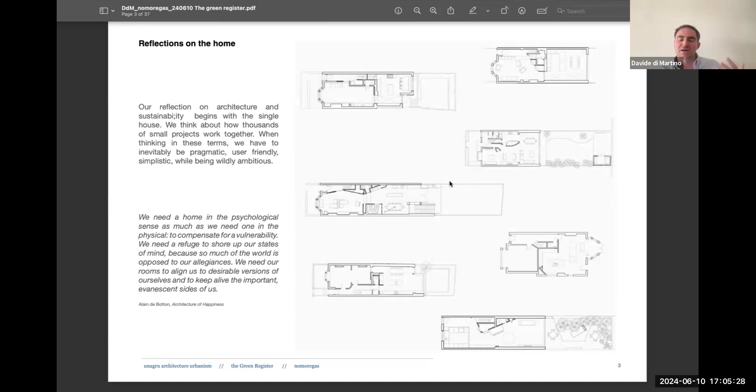And therefore, while we work on very single particular cases, our eyes are always open and attentive to policy and to changes in technology. So these are some of our houses, and these are some of our urbanism proposals. And so part of our passion for architecture is sustainability.

We are concerned about climate change, of course. And so we spend some of our time on research and doing things that we like and we think are good. And Nomoregas is one of these things that we did 18 months ago. So why and how?

Well, at the beginning, it was the war in Ukraine. I personally felt a bit helpless and useless facing this kind of aggression, and it was really troubling me. And so being a designer and also a researcher with some academic experience in my past, I decided to try and research and provide information to help in some way reduce our reliance on Russian gas.

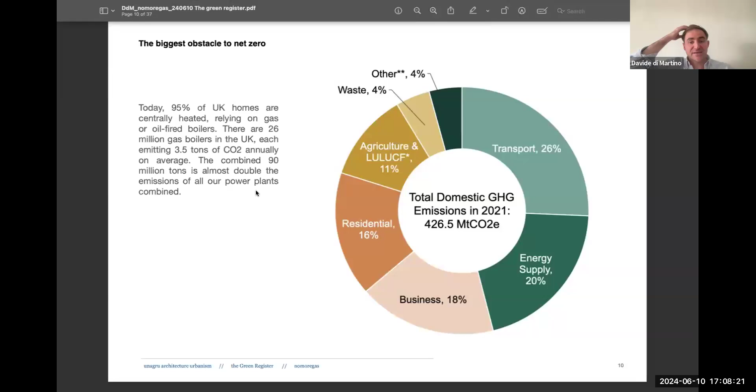And this is because what the data says is that gas boilers are probably going to be, in the medium to near future, the biggest obstacle to achieving net zero, especially in the residential and business sectors, because it's probably the hardest problem to solve. In fact, today 95% of UK homes are centrally heated. There are 26 million gas boilers, which combined emit more greenhouse gases than all power plants together.

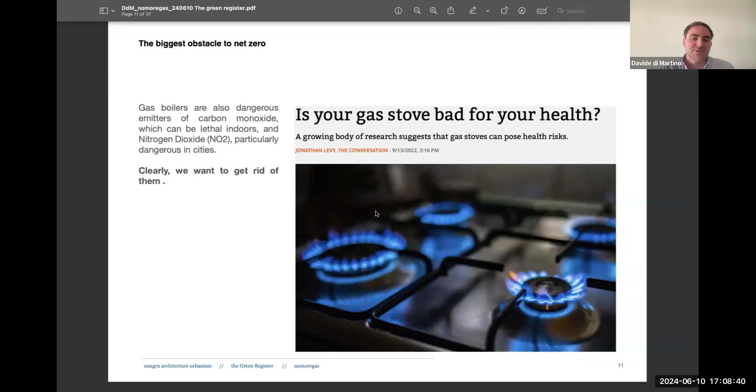Gas is also a health hazard, both indoors and in the cities, because the combined effect of so many boilers affects air quality. And there are so many boilers that a lot have to be replaced. About 1.7 million boilers are replaced every year. That's about 1 every 8 minutes. And unfortunately, of those, only 35,000 are replaced with heat pumps.

The pace of replacement is so slow; it would take hundreds of years to get there. So clearly, something is wrong with policies surrounding boilers. But if we don't tackle this issue, then the greenhouse emissions from the residential sector and from the business sector will hardly reduce quickly enough.

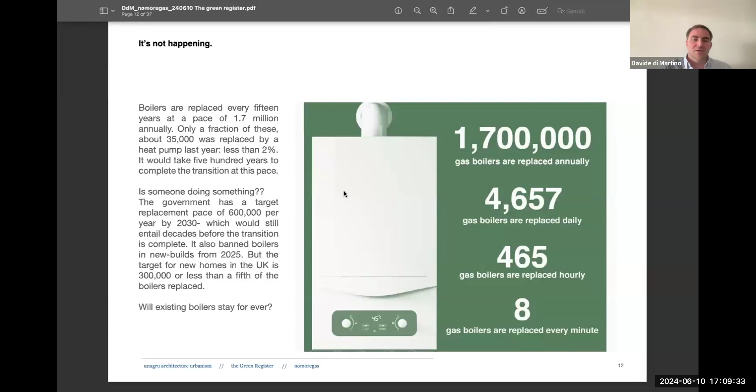So where does the research come in? The obstacle to replacing gas boilers is twofold. On one hand, there is, of course, economics and policies. On the other hand, there is a lack of technology or knowledge of technology. The best alternative to a gas boiler is a heat pump, which is essentially renewable energy.

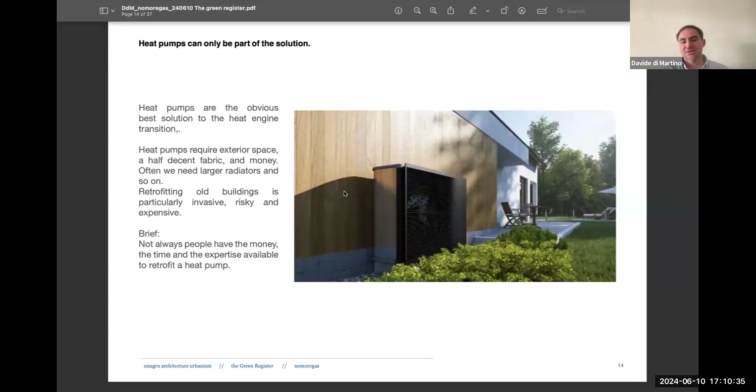But if we investigate all the case studies of the UK built environment, there are many cases where a heat pump is either too expensive, too invasive, too difficult. There's not enough open space, etc. So Nomoregas comes as a recognition that we need to find more alternatives to gas boilers that are not just heat pumps and are not just direct electrics.

Among the sources of our research is this Carbon Trust report on the policies that could help transition away from gas boilers and towards heat pumps. This was the focus of that report published by the Carbon Trust for the GLA.

And that report showed that in several cases, especially small leaky houses and flats, installing heat pumps was either not viable at all or too expensive from a carbon point of view, which means the extent of the retrofit required to install a heat pump entailed so much investment in carbon dioxide at the beginning that it would take too long to pay back. And this told us that connecting retrofit with the energy engines, which is boilers, sometimes is not the best idea.

Because, as we said before, there are 1.7 million boilers replaced every year. We cannot imagine that to replace each one with an electric alternative, we have to deeply retrofit the house.

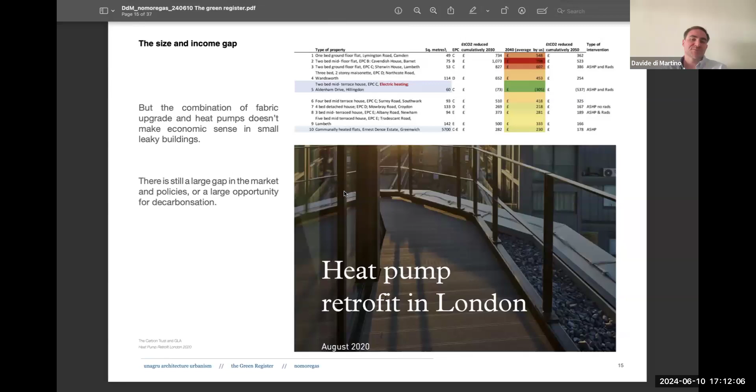So we're talking now about decoupling deep retrofit from replacing heat engines, to have more and more opportunities to replace the heat engines even before the retrofit. And one more reason to be careful about connecting heat engines and retrofit is that in old buildings, retrofits have to be very, very accurate and careful, because there are several risks of kind of ruining old buildings.

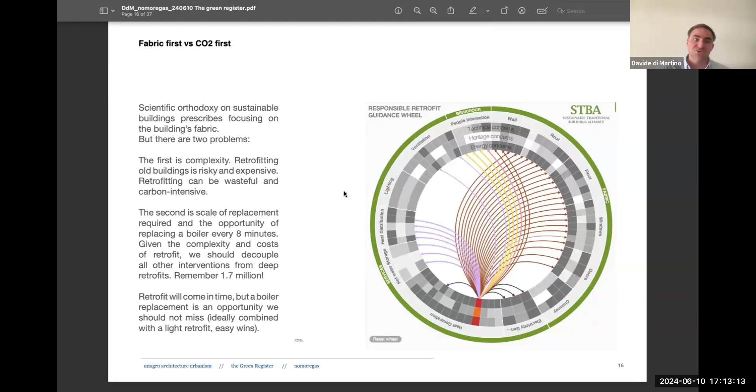And there's no need for me to explain this in this context because, of course, we all know, having attended Green Register seminars in the past. But suffice to say that there are several institutions and bodies that help us understand the complexity of retrofitting old buildings. And in many cases, at least in our work, we tend to suggest to our clients to be very, very careful and to select accurately the best interventions on old buildings. In fact, retrofits can go awfully wrong, even with the best intentions sometimes.

Now the main reason why gas boilers have been so popular, apart from technology, and have remained popular in the last few years, is that the orthodoxy said that the price of gas is lower than the price of electricity. And this has been historically true, but we've also seen with the war, for example, how the price of gas can escalate, and therefore there's a volatility there that creates a degree of risk of relying entirely on gas.

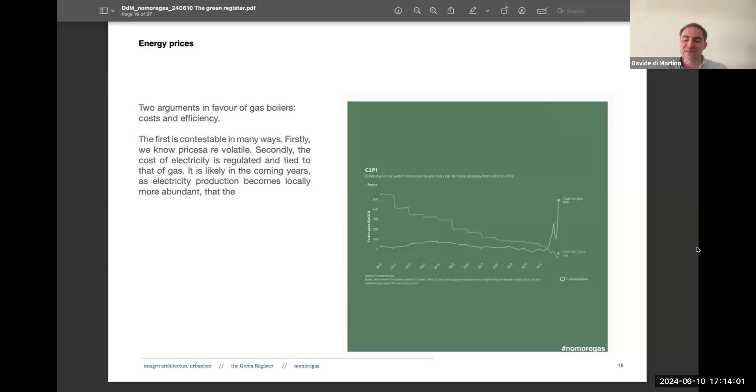Another part of the orthodoxy said that to switch from gas to direct electric heating would entail a higher output of carbon dioxide. So until, say, 10 years ago, to replace a gas boiler with direct electric heating, say electric radiators, would have caused more emissions of carbon dioxide, because the electricity required to heat a space was generated with gas-fired power plants, and the inefficiency of the electric heater made it so that the same amount of heating was causing more carbon dioxide. Now this has changed, and this is changing.

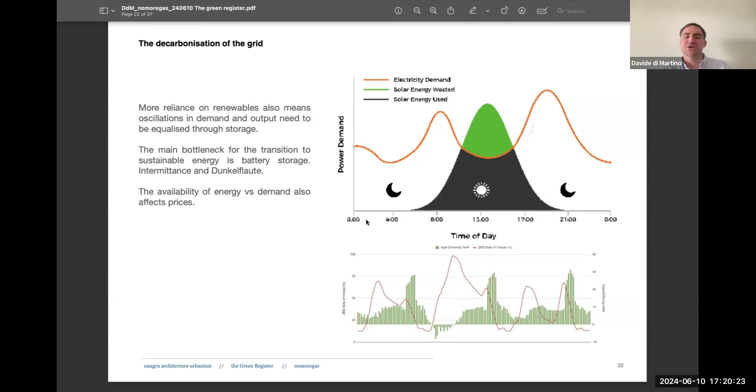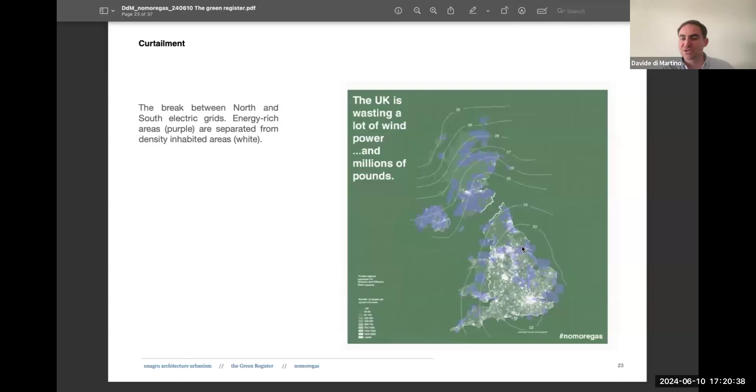Now, if the grid is decarbonizing, it also means that there is more intermittence. There are several other issues with the grid, and with these issues come questions about the cost of power. So of course, the power is more expensive when there's high use, especially with solar and wind. So among the technologies that we have sought for at No More Gas were the different forms of heat batteries. Furthermore, apologies, there are also issues with the way the grid in the UK is built, where most of the production from wind comes from the north, and most of the consumption is in the south, and there are not enough connections between north and south. In any case, this means that there's more and more need for ways of storing energy, whether it's electric energy or simply heat.

So among the technologies that we have promoted and incorporated in No More Gas are heat batteries. This is one of them, but there are now more and more coming onto the market. These are machines that are connected to the internet, so they figure out the costs of energy during the 24 hours. They charge up with heat when the energy is cheaper, and then, effectively a heat battery, like a big warm concrete stone block, it will heat water when needed.

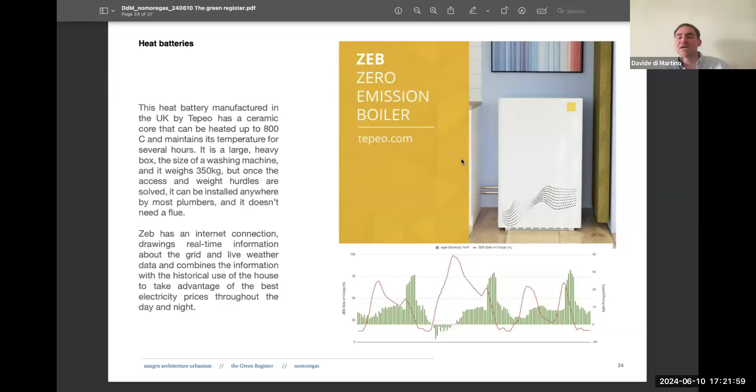And so these products, of course, are not gas boilers, therefore are electrically charged, but they could also help ease the peaks and troughs of energy production, because they of course charge when there's an excess of energy and discharge when there is an excess of demand.

Another version of this heat battery is this product called the Mixergy tank, which I think, again, at the Green Register, is quite well known. In this case, it's a pressurized hot water cylinder that again is connected to the internet and charges when there is the least demand, if possible, when the cost is lower, and also uses less energy because it heats the water only to the extent that is needed.

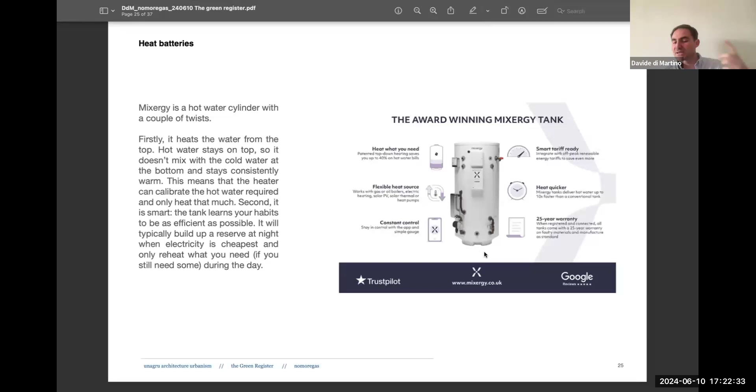Sorry, can you hear me? Yeah, we can hear you now. How long have I been muted for? Oh, only I think a couple of seconds, not very long.

Okay, sorry. So then, if we electrify the grid, of course, we have to try and use the least possible amount of energy. We don't want to have to bulk up the grid too much. So any form of direct electric heating that is more efficient than the electric radiator is welcome. And this that we're showing here is very popular among our affluent clients. It's an infrared heating panel, it's a fleece really, that's hidden behind the plaster and is incredibly comfortable. It's superb. So it is one form of electric heating that is much more efficient than direct electric and also looks great. And so this also is a solution.

In our office, we have of course a much lower budget. Instead of this infrared that is hidden in the plaster, we have visible panels, which also are very, very comfortable. So we've tested the technology ourselves, and we love it.

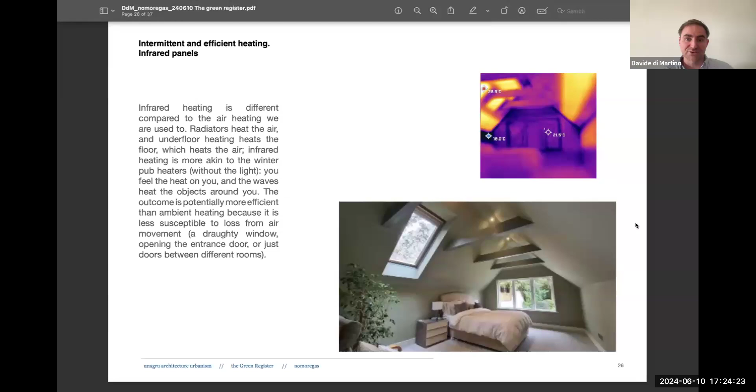But when there are other constraints, like the building is too leaky, there's no space, there's not a space for an external unit, then we have to become more creative, and that's where heat batteries, infrared, or hot water cylinders, or a combination of the three, depending on the size, will kick in.

And we simply have links to different material, to different products, and of course, there's no commercial advantage in this. It's just a tool for people, and we just try to keep it up to date, to spend some time on it, but we have no relationship to any of the companies or products that we advise to check on the website. We just hope that this can be a useful tool for people.

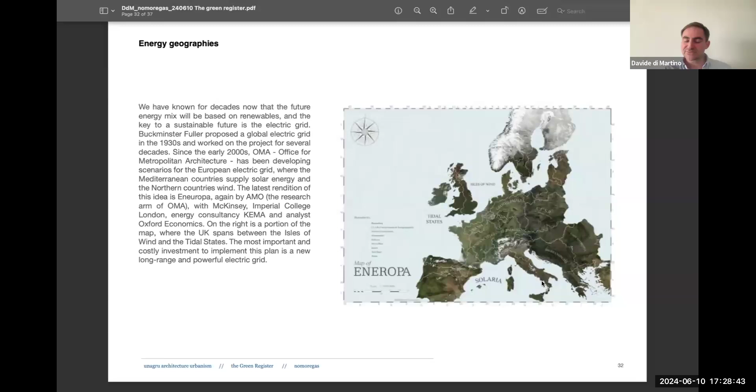And there's been, for quite some time, research on how renewable energies could be the base of civilization in Europe, for example, that has so many different climates, if we were to have an efficient grid connecting north and south of Europe. So OMA, together with others, has been working for about 20 years now on a map of the energy geographies in Europe, where the UK is between the Isles of Wind and the tidal states, whereas the south of Europe is called Solaria, of course, for solar energy.

And the same approach and the same concept would work in the UK as well, where we have a northern grid separated from the southern grid, and of course consumption in the south, production in the north. So we could imagine, for example, policies that incentivize heat batteries north of the divide between north and south, so that the north could have ways of storing the energy that they're producing and avoid curtailment, which is a whole different argument and topic, while we are improving, of course, the connection between north and south.

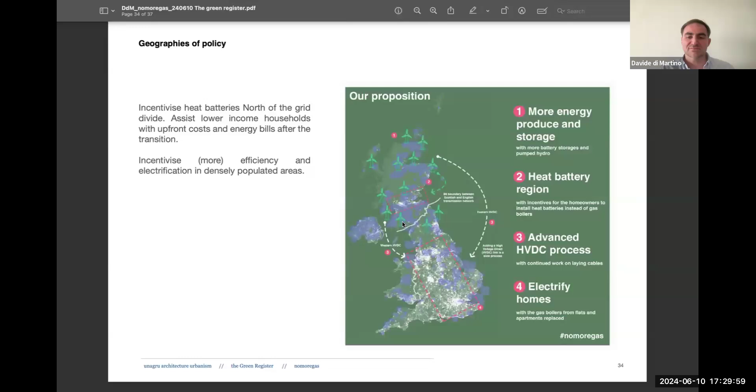And in similar ways, it would be interesting to see what technologies could be incentivized in different areas based on their impact on pollution, based on their impact on the energy grid. And therefore, I think that there's a geographic and policy conversation to be had. So here, for example, we were suggesting things like these. Another way is to see that this, of course, is pollution. Where there's more polluted areas, there could be more incentives for flats, for example, and so on.

And our next steps: of course, this website has been built by us, maintained by us. We're only 5 or 6, and of course, we're looking for more and more partners. We'd like this information to be shared and possibly to be taken on by someone with more manpower, or to collaborate with others with more manpower.

We are, of course, using these technologies in our projects, and where we can, we've started the monitoring results. Of course, data is paramount. But yeah, we are in conversations with the GLA, with LETI. Of course, today we've been representing this here. And my hope is that in the near future, all of this information will be under a bigger umbrella that helps navigate people throughout the retrofit and in improving the sustainability of their homes and businesses.

And that this conversation will become more mainstream and more accepted. And of course, I'm here, so if there's any suggestions, or if anyone wants to help us or collaborate, I would love it. And yeah, I'll stop here and get some questions.